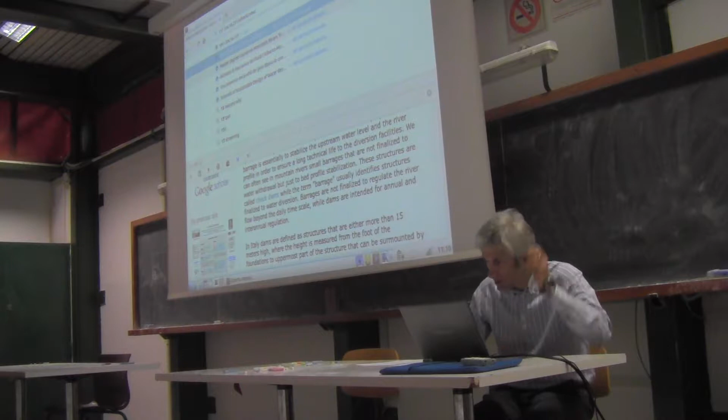Okay. So, let me see, because, okay, connected, perfect. And, so let's go back at our picture. Just 1 second. It's better if I switch to the presentation mode. Just 1 second.

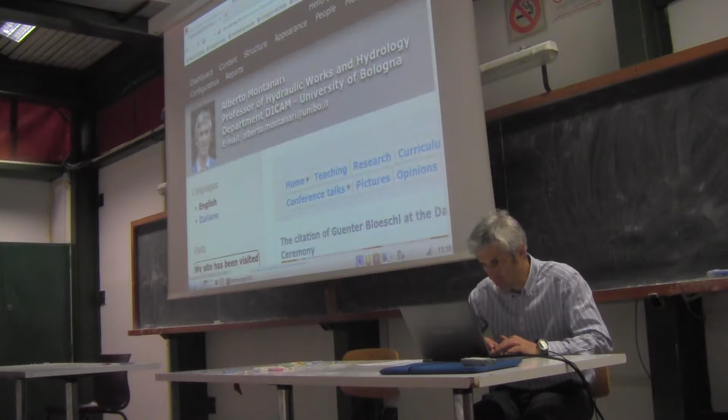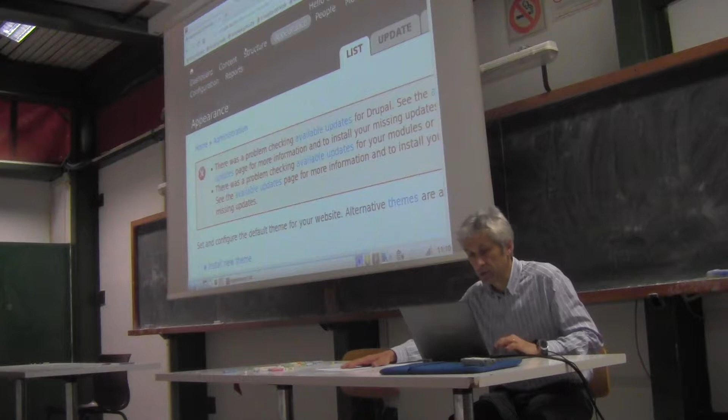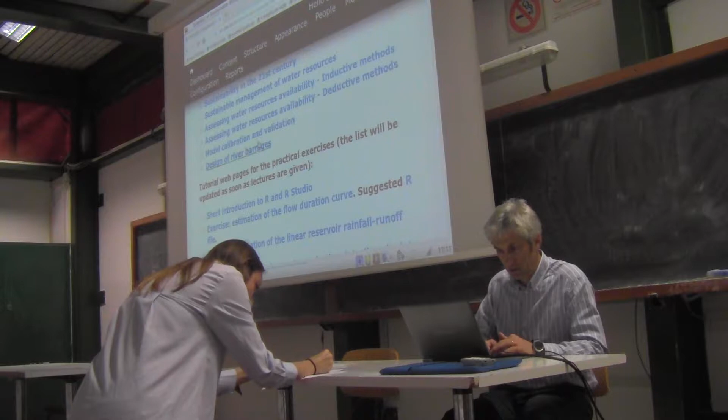And while I wait for the presentation to be ready, yesterday I took your subscriptions for the field trip, May 21st. Is there somebody that didn't? Yeah, please, if you can add your name here. And okay, I need your email and the matricola. Somebody else that needs to subscribe? Very good, thank you. Okay.

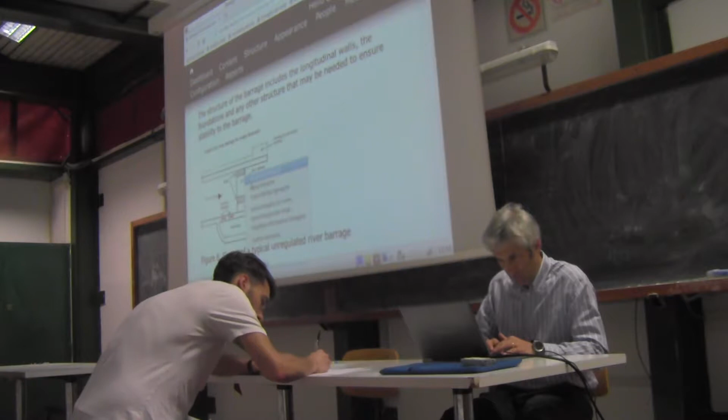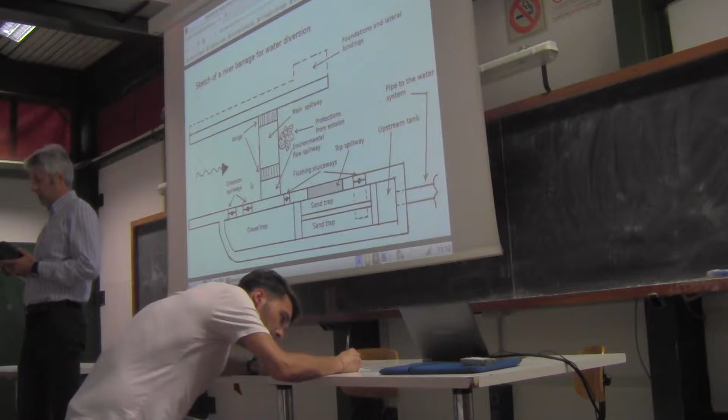It's still open, but I think it will be possible to subscribe also next Monday. Next Monday, there is 1 week left. I think it's possible. But in any case, if you know that somebody else would like to subscribe, please tell them to send me an email. And next week I'll give you some details on what we will go to see. And I just would like to remind you that the plan is to come back by about 1:30 p.m.

And for the details of the field trip next week, I will tell you everything, some information, and also the meeting point, which will be most probably at Porta Saragozza, which is located on the ring just close by. And I think every one of you knows where it is, but next week I'll give more details.

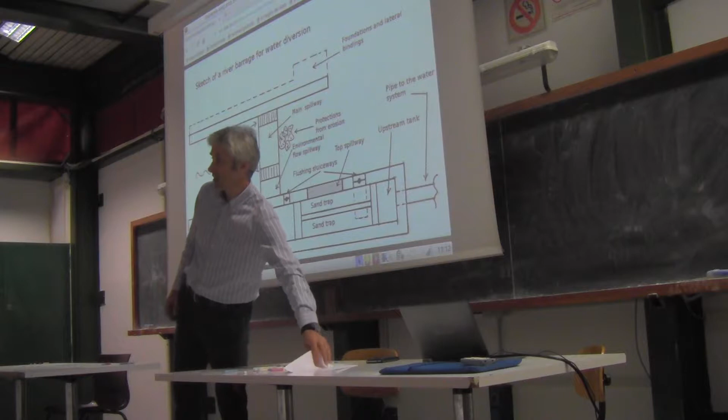Okay, good. And finally, I would like to remind you that we agreed that on Monday we will make a question and answer session at the beginning of the lecture, 15 minutes, maybe also 20 minutes. And the game is that you have to prepare, each of you, if you agree, and I hope that you agree, at least one question for me. And the question can be related to everything concerned with sustainability in water resources management, water resources systems. And the more challenging the question is, the better it is.

Meaning that the idea is that we get a kind of a game, and you try to challenge me, and we will see who wins. But you can take the opportunity also to ask questions on what I explained, what I taught during my lectures. Of course, if you cannot be there, no problem. And if you are there on Monday, I would appreciate very much if you could prepare one question. There is no harm, no risk, only possible advantages.

Good. One more thing, there will be the survey of your opinions on Monday, May 28th, I think it is. Let me see. Yesterday it was 7, 14, 21, 28. So Monday, May 28th, we will have our last but one lecture, and the person who is in charge of it will come at 10:30 to take your opinions. And please, if you can make an effort to be present that day.

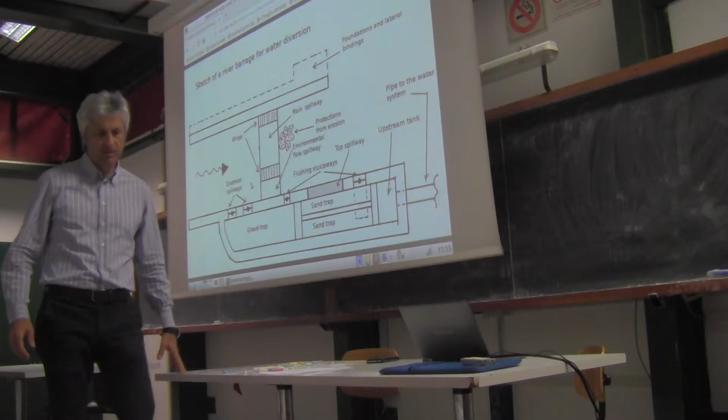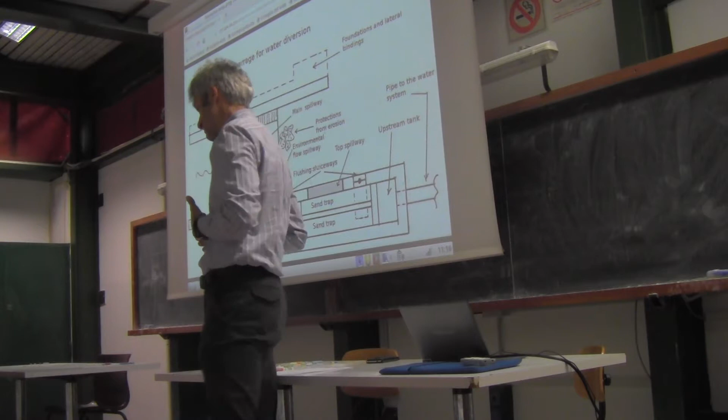Okay, good. And don't forget, if you have any proposal for some interaction. I'm thinking of something to propose to you next Monday after the question and answer session. We still have 2 weeks. It would be nice if you got involved in some more interactivity. And I'm thinking of a web page to be published as part of this ebook that I'm building with these tutorials, on a subject that is relatively easy to be done, and I'm still thinking of it. I know that you're busy during these days because of preparing exams. I will think of something more to propose to you.

Okay, now let's move forward with the design of river barrages. And what we said yesterday was an introduction to the different spillways or weirs.

And we talked about the environmental flow spillway, the lowest one in terms of altitude. And then we talked about the main spillway and the diversion spillways. So in order of increasing elevation, we have the environmental flow spillway, the lowest, and then the diversion spillway and the main spillway, which is the highest.

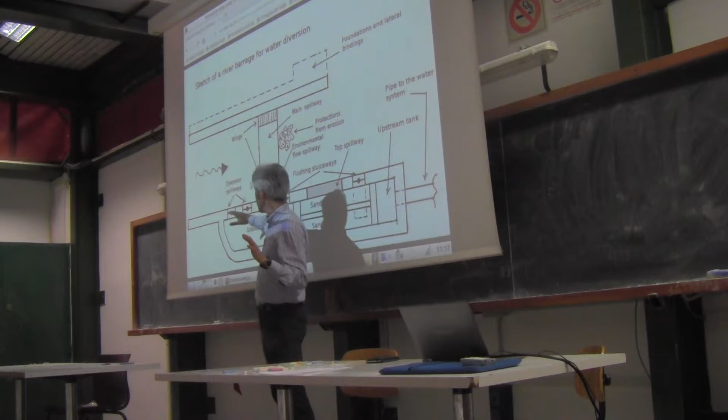And the elevation, again, is decided in order to set priorities for the different flows. The high priority flow is the environmental flow, and it's high priority. And then, after this priority is fulfilled, we go to the diversion spillway, which has the second priority. For the designer and for our customers, it is the first priority.

But according to our overall context and according to the Italian law, the highest priority is the environmental flow spillway, the lowest. And then the diversion spillway; of course, the diverted flow is our second priority. And then, if the flow in the river exceeds the sum of the environmental flow plus diverted flow, there is an excess flow that we can release as well in the river downstream through the main spillway.

This is important to understand because it's very simple if you think about it, but on the other hand I see that sometimes it's not; probably we would need to go and see a real barrage in order to better understand. I see that for students it's not so clear, so I'm spending some more time.

Okay, now let's look at the other components of a typical barrage. Once the flow is diverted, we need to clean the diverted flow, to clean it from sediments and floating material. Because of course, when you get water from these spillways, you may have some sediments in it, especially if you take the water during high flows. When there is high flow in the river, there is higher energy. Higher energy means erosion, means bed load, and means suspended material.

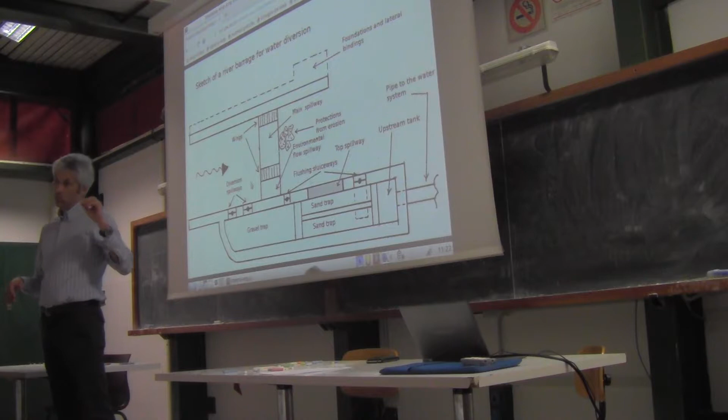So typically, we use a canal as a water supply facility when we don't have to cover big differences in elevation, when the withdrawal is more or less at the same elevation as the delivery. When we have to cover big jumps, big differences in elevation, we use a pipe. In both cases, and this is the essence of what I want to say, if you have suspended material, it's a problem.

Because if you use a canal, you have reduced velocity in the canal, the suspended material settles down, and the canal gets covered by sediment, filled up by sediment. We have siltation, it gets silted, and therefore after a while you have to clean it. And this is a problem, so we don't want sediments in the water that enters into the canal.

If we have a pipe, it's even worse because sediments may erode the pipe, because in the pipe I have a high velocity of water. If I have gravel into it, in the bends especially, we have gravel hitting against the pipe and causing degradation, erosion, failure. So we absolutely don't want anything else than water into a pipe. We even don't want air into a pipe, because if we get air into it at high velocity, air generates turbulence and again degradation of the pipe. We just want water.

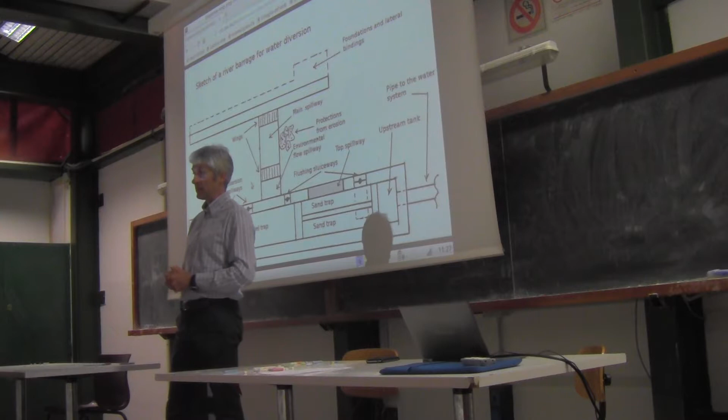The moral of the story is that you have to get an indication from whatever, producer or regulations, law in force. You have to get an indication of the maximum size of the suspended material that is tolerated downstream for the water use. This is information that you have to get.

How to remove sediments and floating material from the diverted flow? Through the gravel trap and the sand trap. Basically, these are pools. Pools where water slows down. By slowing down, it loses energy, it loses capability to transport sediments, and the sediments settle down. Very simple. They are also sometimes called sedimentation pools.

The idea is to divide these pools in a sequence of chambers, because as water is just diverted, you still have relevant velocity of the flow, and therefore we slow down the flow gradually. So in the first chamber, the velocity of the flow is still significant, and we can remove there only the material with the highest size. So what is the name of the material of highest size? Typically gravel, so we call it gravel trap.

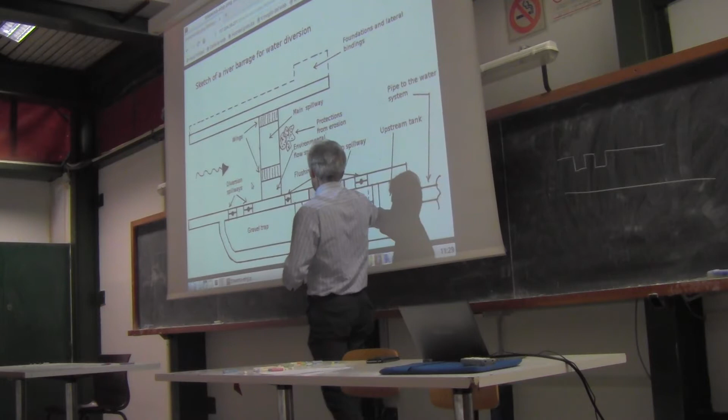So here are our diversion weirs. They are typically equipped with gates. So these are the gates that in this position are open. And these gates are generally maneuvered by an engine that is placed here. Let me take a chalk of another color. So this is the device that allows us to maneuver the gate. This is the engine. And through this engine, which is electronically driven, we can close or open the gate in order to close the diversion or to open it.

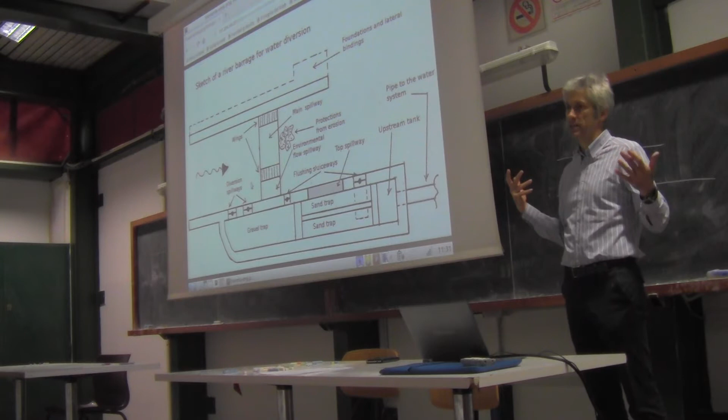Keep in mind that usually we stop the diversion when the river flow exceeds a given threshold. And why is that? Because when the river flow becomes very high, there is a lot of sediment transported by the flow, and we don't want to take that very dirty water, which is not dirty, it's just loaded with sediment. Okay? Here we have our gravel trap.

So this is the gravel trap. And then we have this low crested weir, which is placed here, which is the separation between the gravel trap and the sand trap. And typically the flow here is in this position. So we have the water level, the surface of the water, placed in this position, and the weir is submerged. And the scope of this weir is to stop the gravel, to keep the gravel in the gravel trap. So here we have our gravel.

And of course, periodically, once in a while, we have to clean it. We have to remove this gravel. And the way to clean it is a bottom discharge that is located here, which is normally closed, and it's also indicated here. And it's called flushing sluiceway. A sluiceway is a term that is used to identify a bottom discharge.

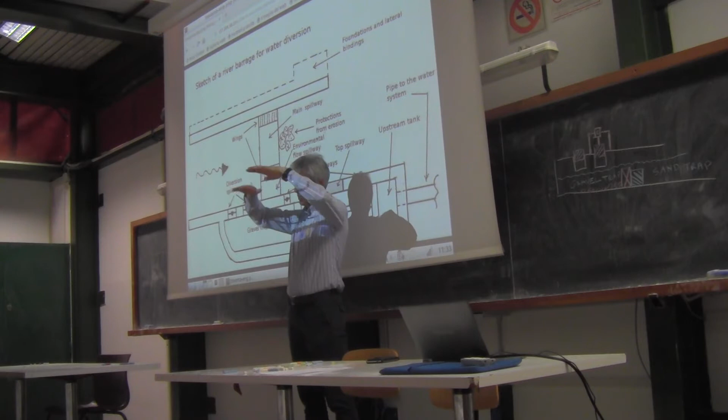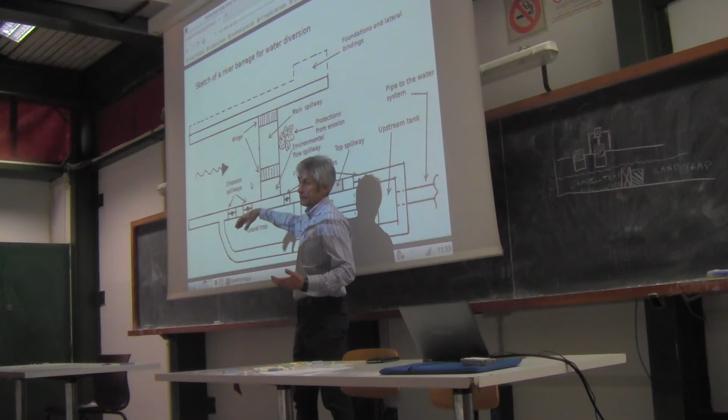The difference between a weir or a spillway and a sluiceway is that the sluiceway is usually submerged. When you open it, the surface of the flow completely covers the sluiceway. So the sluiceway works under pressure, at least when it is open. And therefore, by working under pressure, you have a high velocity of the flow through the sluiceway, which has sufficient energy to help clean the gravel trap. So with high velocity, the gravel is transported by the flow through the sluiceway.

And then at the end of the story, once we empty this, we have to intervene manually to fully remove the gravel. Again, the difference is that a sluiceway is submerged, while a weir is not. The upper part of the surface of the flow is in direct contact with the atmosphere.

I hope I am clear enough. Did you understand? Okay, the difference: a sluiceway is a way out that is completely submerged, while with a spillway, also called weir, the flow passes over the weir by staying in the upper part, in direct contact with the atmosphere. Is it clear? Okay.

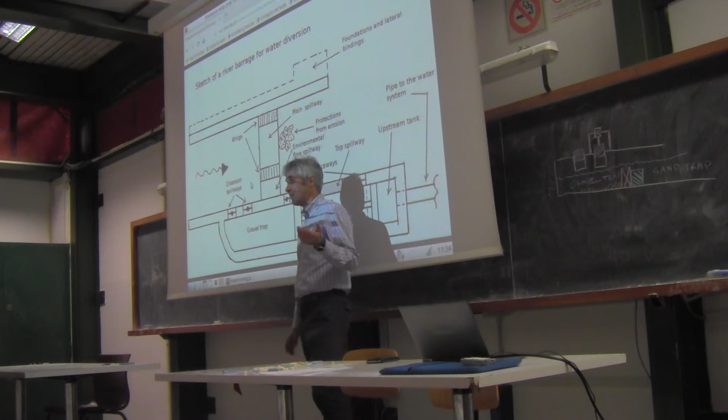And then we get into the sand trap. The sand trap usually is longer than the gravel trap. As an order of magnitude, we usually say that the length of the gravel trap is between 1/3 and half of the length of the sand trap. Why is the sand trap longer? Because sand takes more time to settle down, to reach the bottom of this pool. And therefore we want to make the sand trap longer, to give the sand more time to settle down.

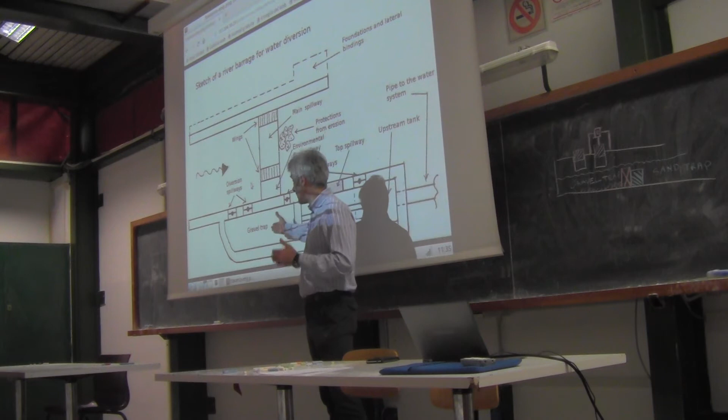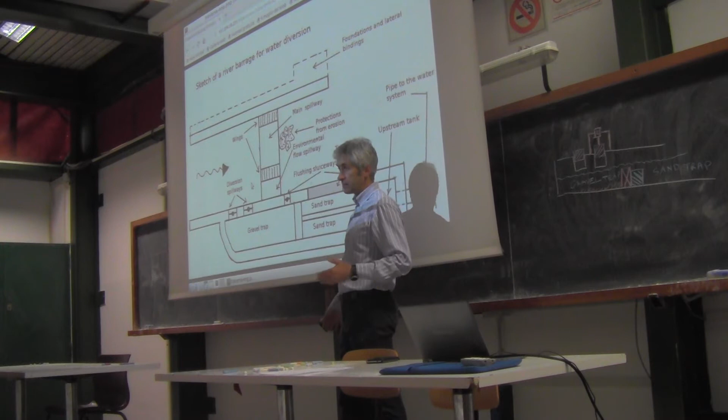And then the sand trap is sometimes divided in two channels, and the gravel trap may also be divided into two channels. The reason is that if we want to avoid interrupting the flow during cleaning, we need two ways. While we clean one way of the sand trap, we can use the other one. And of course we need gates here. If we want to isolate one of them, we need to put gates over the submerged weir which separates the gravel trap from the sand trap.

But in some cases it's not divided, it's just one single pool. So it depends on the use of the water, on our needs downstream. The sand trap must be equipped with a bottom flushing sluiceway in the same way, because we need to clean it. It's also equipped with a top spillway, which allows us to bring possible excess flow back into the river.

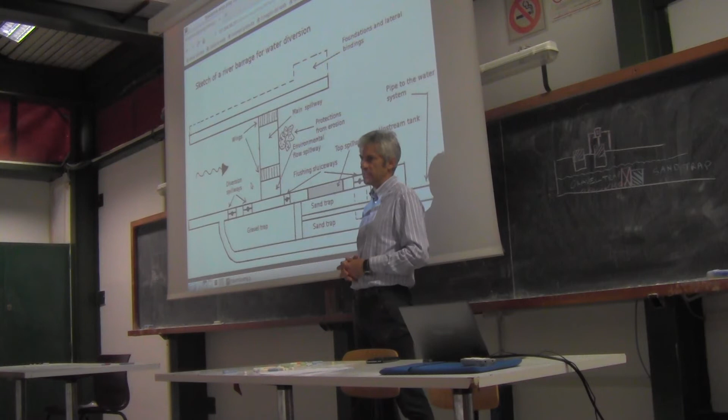So if for some reason we mismanage this structure and we get an excess flow into the sand trap, which is something we normally want to avoid because we need reduced flow in the sand trap. We don't want excess water because excess water means turbulence, disturbances in the sand trap, which reduce the efficiency of the sand trap itself. So if by chance we get excess water, we need a top spillway to make sure that excess water is released back into the river.

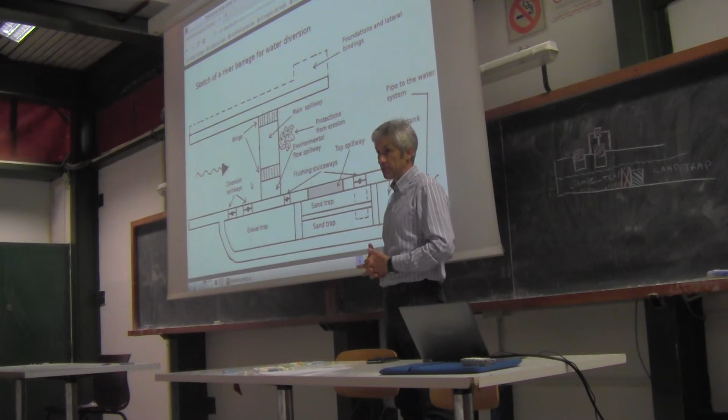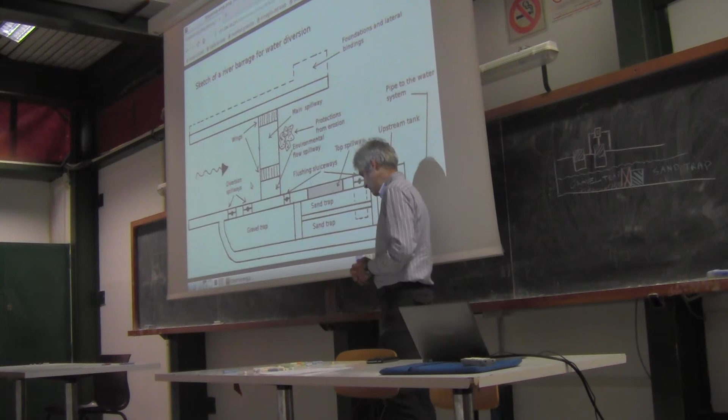Okay. At the end of the sand trap, there is another submerged weir, which keeps the sand in the sand trap. And then water flows into what we call an upstream tank. Basically, it's a pool that we make in order to fix the starting point of the pipe or canal to the water system.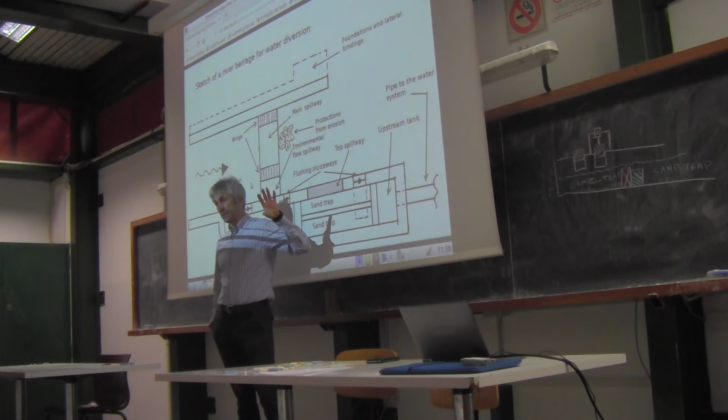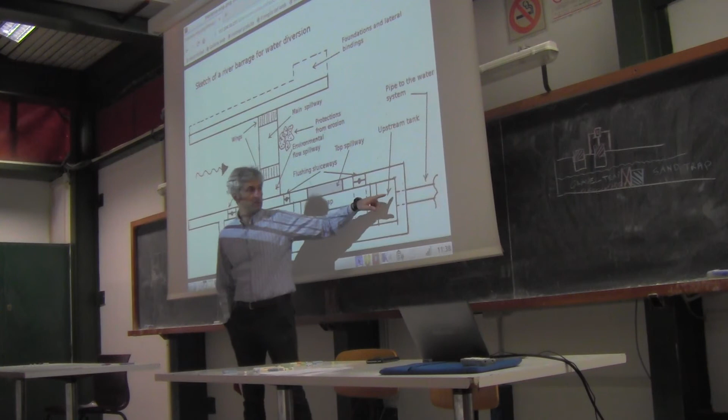If we use a pipe to deliver water downstream, this upstream tank is needed because we want to make sure that air doesn't get into the pipe. The reason is what I explained to you before. The presence of air is detrimental, and therefore we want to make sure that the highest point of the pipe is completely covered by water. Let me make a sketch here.

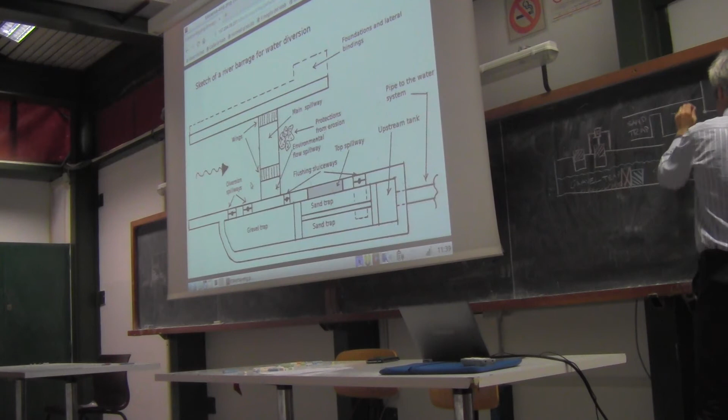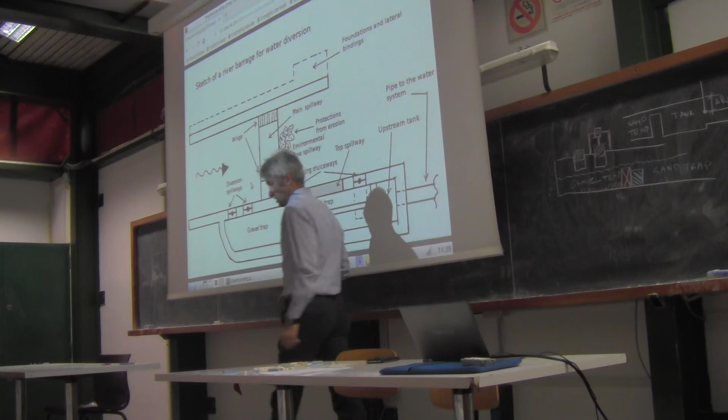This is our upstream tank, which is divided by the sand trap. Here we have the sand trap, and this is our tank. We want to make sure that the ceiling of the pipe is well covered by water. There must be something that we call delta H, coverage, sufficient coverage of the ceiling of the pipe.

I'm not sure whether in English ceiling is a good term for indicating the upper part of a pipe. In Italian we say cielo, which is ceiling, or soffitto, to indicate, as I say, the highest point of a pipe. I think it is ceiling in English, but I'm not really sure. But I think I conveyed the meaning. Submergence of the pipe. We have to make sure that there is a submergence, a minimum submergence. Okay.

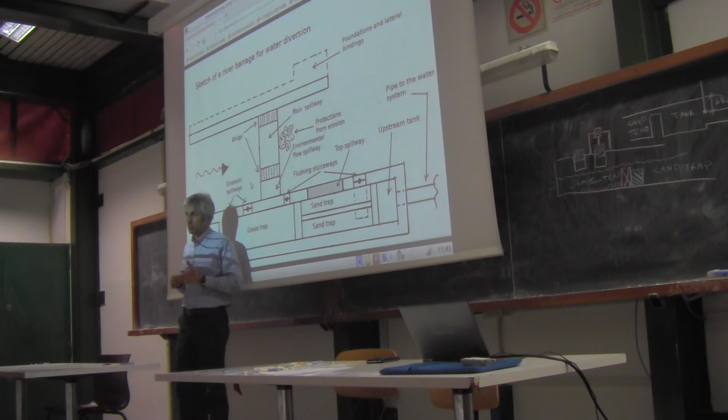Now we have to give some indications to you to design these parts. I think I completed my description of the main behaviors, and the last thing that I would like to say is that downstream the main spillway you need to protect the riverbed from erosion. And the easiest way to protect it is through boulders. You place boulders there in order to avoid erosion downstream. Erosion typically happens during high flows, and it's dangerous because it can undermine the stability of the barrage, so you have to prevent it. There are several options that can be used.

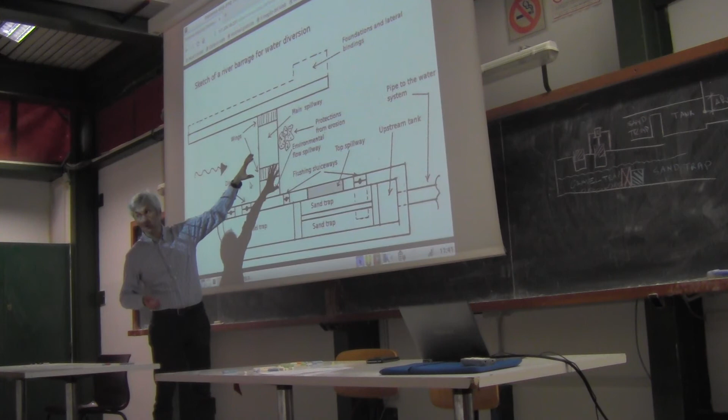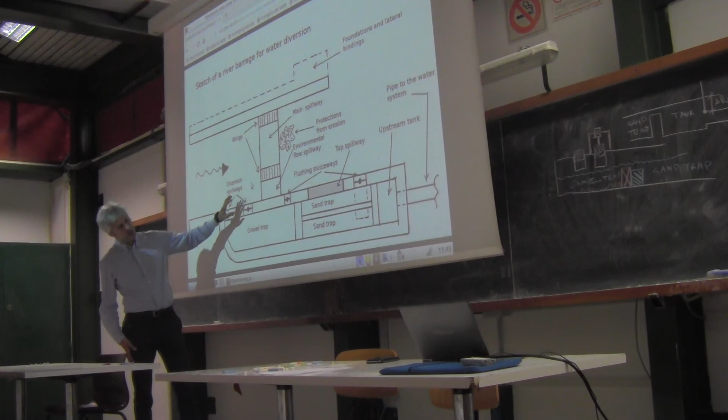This is the easiest one, but of course the diameter of these boulders needs to be designed. We don't insist on this because this is something that is related to structural design, and not really structural because it's a prevention of riverbed erosion, but it's not strictly related with water resources management, so I don't insist on the design of this structure from a structural point of view. But let me instead discuss a little bit how to design these components that I already introduced.

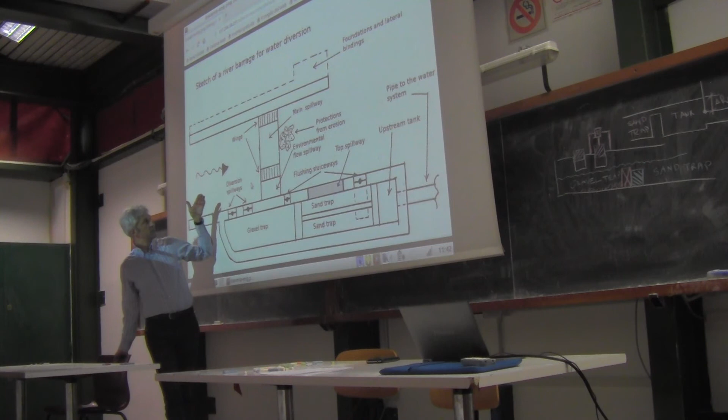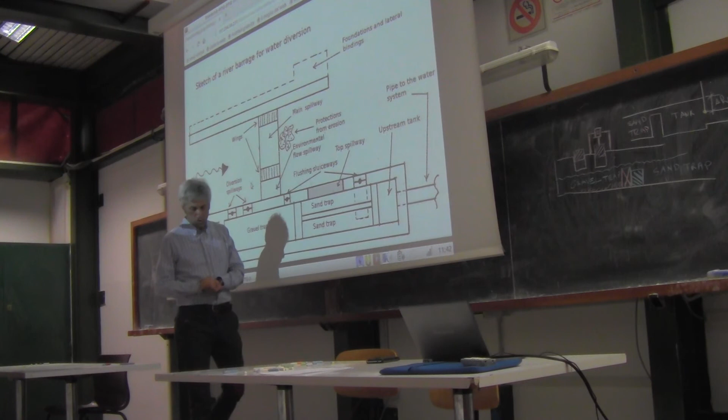And we already know how to estimate the design flow through the flow duration curve. Now let me talk about the first issue, which is designing the elevation of the three spillways that I introduced just before. So what is the elevation with respect to the riverbed of the environmental flow spillway? What is the elevation with respect to the riverbed of the diversion spillway? What is the elevation of the main spillway? Okay, we said that the environmental flow spillway is the lowest one. So what is the elevation of this environmental flow spillway?

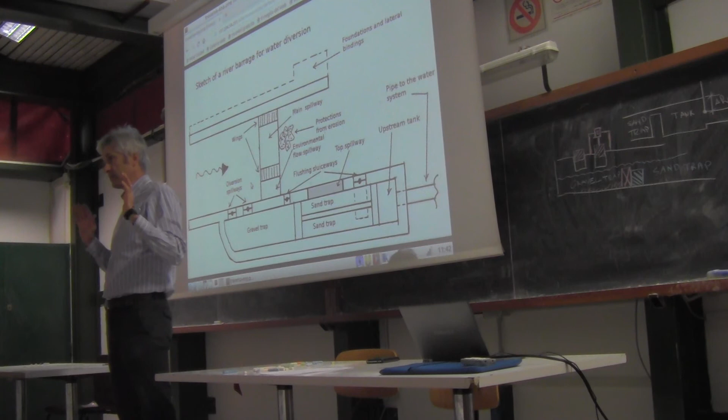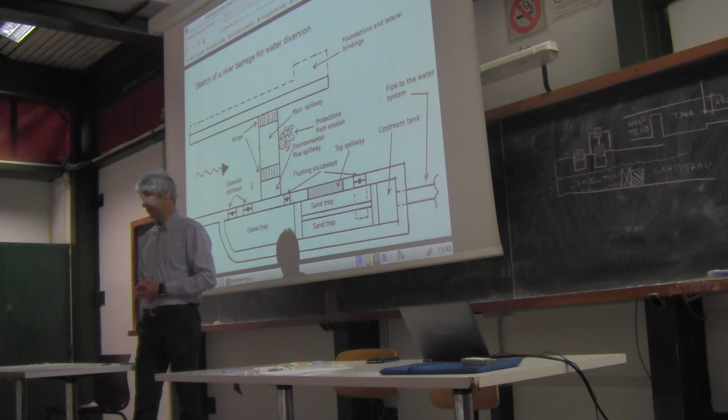First, it is placed at a higher elevation with respect to the undisturbed riverbed. Why is that? Because we want to create a reservoir upstream. And therefore, typically, what we need to do is to estimate what is the water volume that we want to store upstream the barrage. And the water volume needs to be estimated by ensuring the compensation, typically during the 24 hours of a day, of the mismatch between water demand and water availability.

So, by assuming that the flow in the river is constant during the day, this is a typical assumption that we make, you have to estimate the variability along the day of the water demands. And then with techniques that we don't inspect in detail, we derive a compensation volume. It's intuitive, we can understand easily that if the river flow is constant along the day and the demand is not, we need some storage to compensate this mismatch. We estimate the needed storage, and based on a survey of our river, we decide the elevation of the environmental flow spillway.

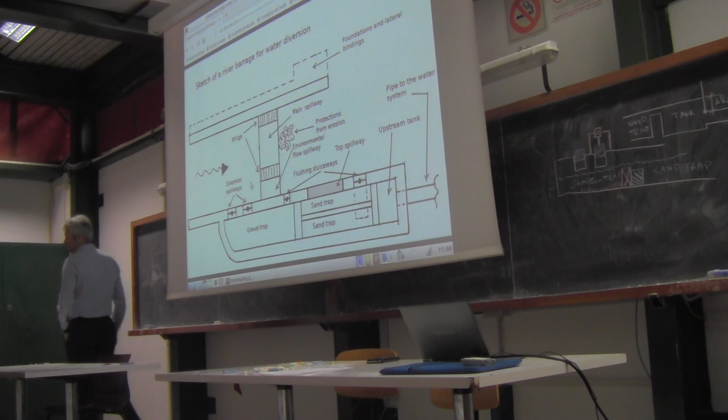This is a rule of thumb. Actually, there are other issues that you need to consider, which are the geological features of the place, which may suggest that you better design a structure that is not very elevated, because you understand that the stability of the structure depends on its elevation. The higher the structure, the more relevant are the destabilizing forces against it. And therefore you may want to stay on the safe side, to accumulate less water upstream in order to reduce the destabilizing forces.

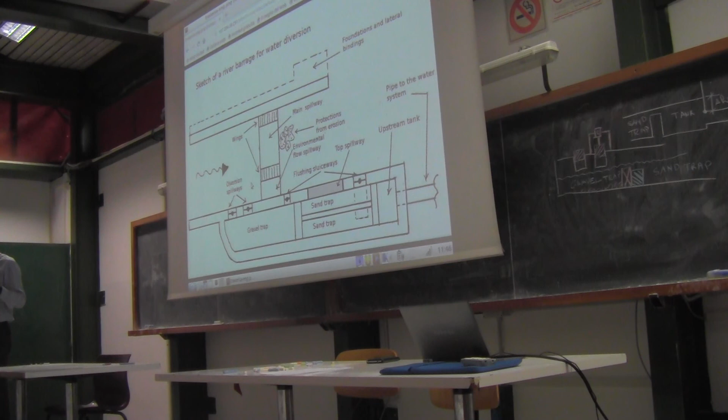Water, in principle, is exerting a relevant pressure on the structure. This means that if you decrease your storage, you may not have sufficient volume to compensate the mismatch in some seasons, typically in the low flow season, but okay, we can afford it. Geological features then, and also